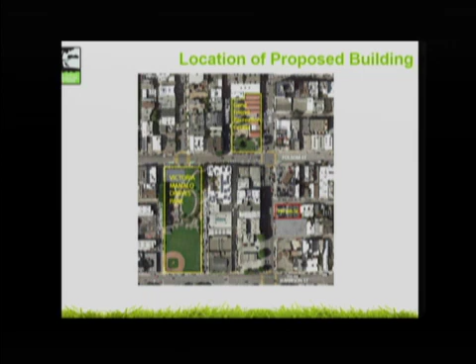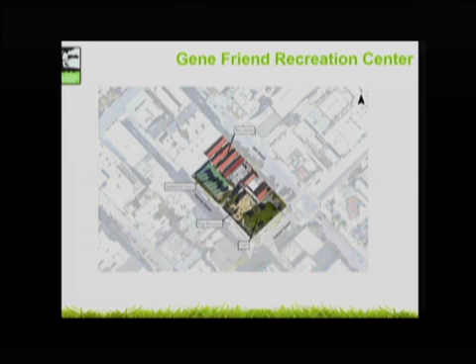So here is the layout of the Gene Friend property. The park features a basketball court, rec center, grassy area, and playground.

And this very hard to read slide is an illustration of the preliminary park layout that the department is working on. We're in the process of redesigning the Gene Friend property.

This layout was presented to the Civic Design Review Committee and the Eastern Neighborhood CAC in December of 2015. This is not an adopted concept plan, and it's being provided to you only for informational purposes. The preliminary design is still in development. We are currently working on a feasibility study, and features of the layout may shift.

As shown here, you can see that the proposal moves the rec center building forward to the corner of 6th and Folsom Streets, to activate that corner.

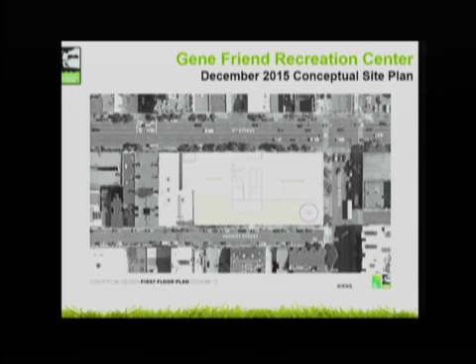So I'll now present shadow images for the existing and proposed park layout that illustrate the shade crossing the property. This image is the largest project shadow. It would occur on March 8th and October 4th, around 8 to 10 in the morning. The greatest shadow impacts occur in the mornings, in the early spring and fall.

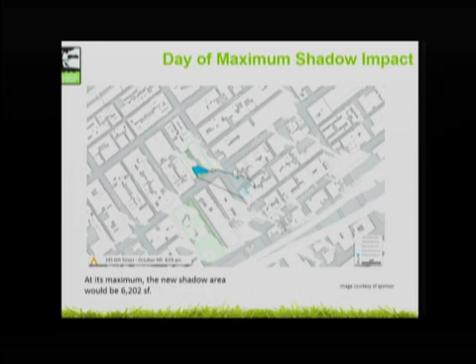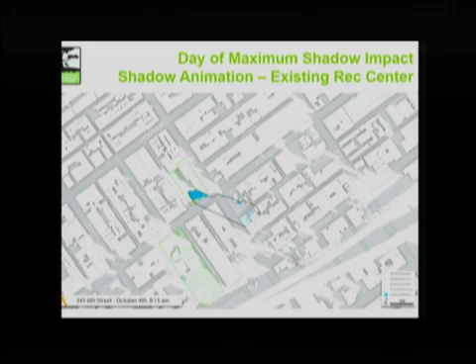And this animation illustrates the shadow crossing the park property. As you can see, it leaves the property just before 9. It shades the entry areas, grassy area, and portions of the playground.

So this animation, for informational purposes, is the proposed park layout that I mentioned is subject to change, but as you can see, the building being moved forward to the corner of Folsom and 6th intercepts some of the project shadow.

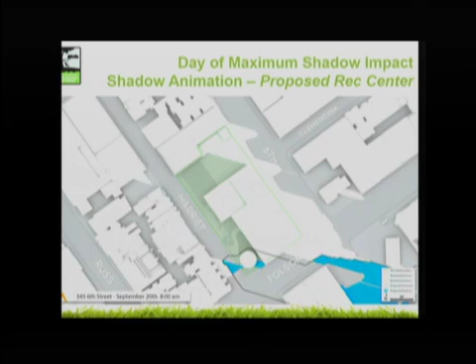The 1989 memo provides guidance on how to assess shadows for this park, and an Annual Cumulative Limit (ACL) of 0% was established for Gene Friend. The property would introduce an additional 0.39% of new square foot hours of shadow annually, which would increase the shadow load for the park to 47.66% for the year. For this reason, joint action by the commissions is necessary.

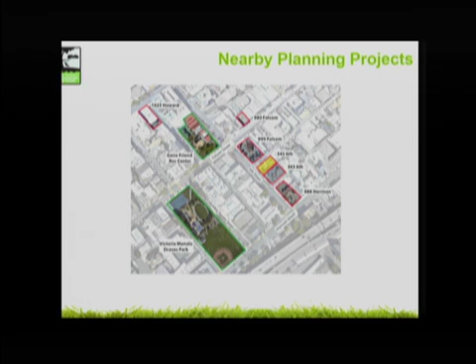In addition, the commission likes to consider cumulative projects within the vicinity of the park. This map illustrates other projects in the vicinity that have the potential to shade Gene Friend. One of the properties, immediately adjacent to the subject property, is 363 — the subject property is shown in yellow. 363 was approved by this commission last fall, and the one just south of that, 988 Harrison, wouldn't reach Gene Friend.

Finally, the sponsor will speak to this more, but to summarize community outreach and benefits for the project: the sponsor facilitated 11 meetings for local stakeholder groups, and letters of support and opposition were received by the departments and included in your packets. As explained, the project would provide 14 affordable units, as well as pay the required impact fees and make streetscape improvements. This concludes my presentation. I'm available along with planning staff for any questions you may have.

Can you pass that around so we could see what you were referring to? Which one — what you just held in your hand, your presentation? My presentation, please. I have... it's not a copy, I'm having a hard time following. Maybe in the future we could get a copy of the presentations. Thank you. Okay, project sponsor, please.

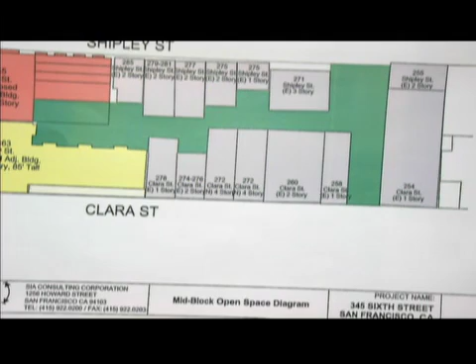This building is 345 6th Street, as we are proposing. Next door is the project that was approved last year. It's also a nine-story building with ground floor commercial. And you see the rest of the block, as we go down Shipley Street.

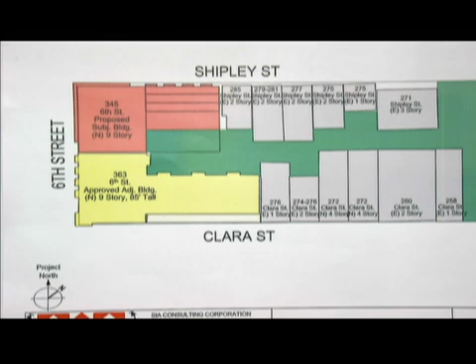So the way that the building is designed is that we have matched the neighbor's rear yard. At this point, there is no open space, no pattern of mid-block open space due to the building that is sitting on both our lot and the neighboring lot. What we're proposing is, just like the neighbor's property approved last year, a 25-foot setback to their property line, totaling 50 feet, which creates an open space that will benefit the rest of the homes down the block.

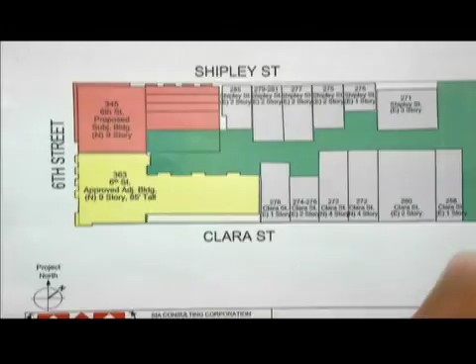In addition, on the ground floor, to give you orientation, we have 6th Street on one side, and Shipley going down the street. We have carefully designed this layout so that we have a generous commercial space with approximately a 19-foot ceiling.

Which makes a great inviting commercial space that is non-existent at this point. And as we go down Shipley Street, which gets into more residential block face, we have provided the residential entrance and 4 residential units that are at the back of the sidewalks.

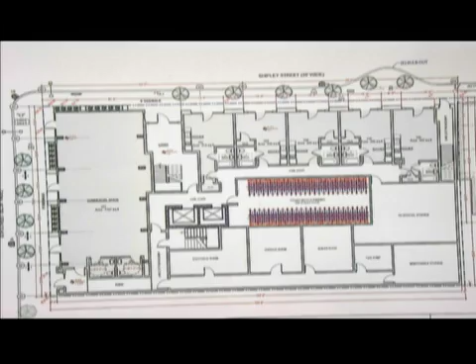One thing that I wanted to point out about this project, the only concern that we have heard face-to-face with the neighborhood, was during meetings we held at the site, the neighbors thought that this was group housing with 1 kitchen on every level, more like transient housing, which made everybody nervous.

So we explained to them that this is in fact studio units. They are rentals, and they have the kitchen in the units. They have high ceilings, by virtue of the concrete construction we are proposing, which allows for a 7-inch thickness of the floors.

At ground floor, we are providing 8 foot 11 inches of ceiling height, which is more generous than most of the units you see in town at 8 feet or even less in some areas. On the upper floors, we have 8 foot 8 ceilings.

By virtue of the ceiling height and the fenestration, if you look at the elevations, we feel there's a lot of volume and a lot of light coming into these units, and by far they're not cramped, dark units. This is a building that we are hoping to keep in our family for a very long time.

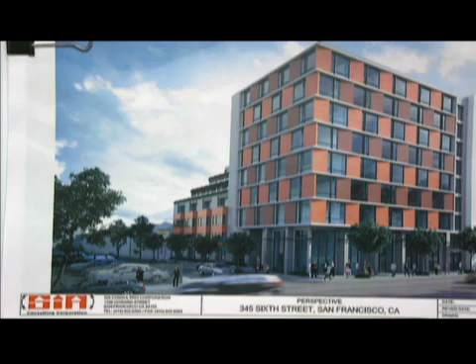From a distance, the building is composed as a simple cubic volume atop a glass podium at 6th Street. Complementing this volume is a 4-story expression organized with garden units, projecting bays, and terraces fronting onto Shipley Street. This is important given the orientation of the building: it fronts a very busy primary street and also a very intimate secondary alley. This was taken into account both in the planning of the ground floor plan and in the elevation.

Along this Shipley alleyway, the street wall is set back from the property line to afford more space at the sidewalk. This was important to both make the street more inviting and to align with some of the adjacent context we have there.

Looking closer at the primary massing, again at the corner, the volume is further differentiated by the expressed horizontal structure. As Russa mentioned, these bands of horizontal structure are further expressed by alternating bands of fenestration, composed of both solid and void with fiber cement panels and glazing floor to ceiling, stretching from slab to slab.

This pattern of solid and void is accentuated by these projecting bays, these projecting slab edges, that provide shadows and further invigorate the elevation with direction, be it in the morning or the afternoon, depending on where the shadows and light are coming from.

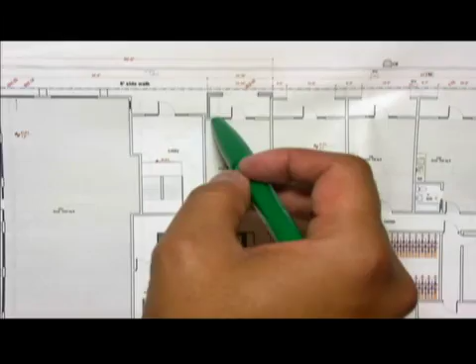Commissioners, you'll see here, this is the original version of this step where we have the unit over here, a small forecourt over here, and then the sidewalk over here. It sounds like the architects can accommodate a raised entry for the stoop, the forecourt, especially if we reorganize where the storefront is and not have it centered, pushing it to the side.

I think the difference between what you saw before and the potential better solution is that there wouldn't be a solid wall. It would be more transparent, but would still raise up and provide that sort of public-private zone in front of the unit.

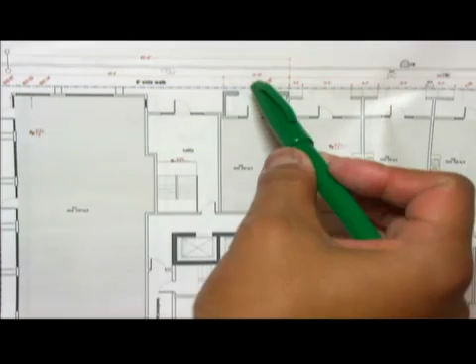The architects can certainly look at some kind of gate to separate between the two, or some kind of screen or transition element that works with the overall design of the building. And to respond to Mr. Gilberti's question, most of the roof is actually an outdoor space for residents to use.

Okay, good. Well, I'm supportive of the items that Commissioner Moore brought up, and I'm even more delighted to hear that through the study of this, at least one version comes close to meeting that and staying within the mass of the project size.

Okay, Commissioner Richards. Just one question, Mr. Sucre. So this proposed entryway solution would look something like in the guidelines where there's a gate, there's a landing, and then there's either a door recessed, or would it be at the...

Correct. Okay, so I'm confident that we can work with the architects to develop a scheme or forecourt scheme that hits upon the intent of the ground floor residential design guidelines. And that wouldn't change the massing of the building? Correct, it would not. Okay, so we're still good.

Right. Okay, Commissioner Johnson. Fantastic, thank you. I think you've answered my question, and we can talk in a second about what findings we should make in our motion on the large project authorization to memorialize that.

I would add that I know there's a potential for the landing to be dark, but you don't necessarily have to have an awning to provide privacy. I'm referencing the newer buildings on King and 2nd, right across from the ballpark, and the ground floor units there have two steps up, glass, a three-foot gate, and then the door. There's no awning, no obstruction, no big huge planters. Those people see thousands of people walking by their doors going to Giants games.